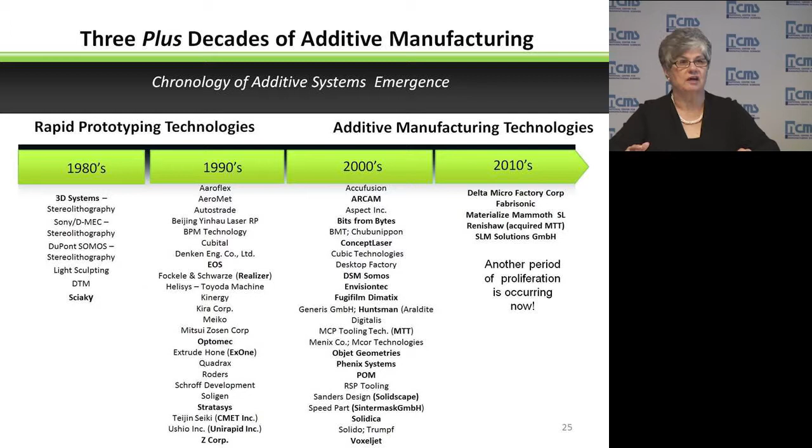Those who are in bold print are the surviving entities going forward into the 2010s, and those who are listed under 2010s are those new companies that have come up so far in this decade. Now we are entering another period of explosion and proliferation of 3D inventions, innovations, and companies entering this marketplace again. So we're liable to see that column grow extensively through the end of this decade and into the next. Next slide.

This is a timeline, just to give you a little bit of an overview. We won't go into it in detail, but we started out as a rapid prototyping program back in 1991. That was funded by the Air Force ManTech organization. And in 1998, we issued an industrial roadmap for additive manufacturing, but back then it was called rapid prototyping, was

the popular term. Then in 1998, we actually entered into the agreement with the OSD Maintenance Policies and Programs Office, with a collaborative agreement. And we took over that particular vehicle to launch the next phase of that rapid prototyping program. And so that began in 1999 and has continued uninterrupted until today in 2013.

Rare Parts today: what I want to tell you is that when we first started back in 1999, the context of the program involved transitioning and teaching the depots how to perform various case studies using additive. But the additive technologies resided in our industry partners. And so our industry partners performed these studies for depots as a learning technique.

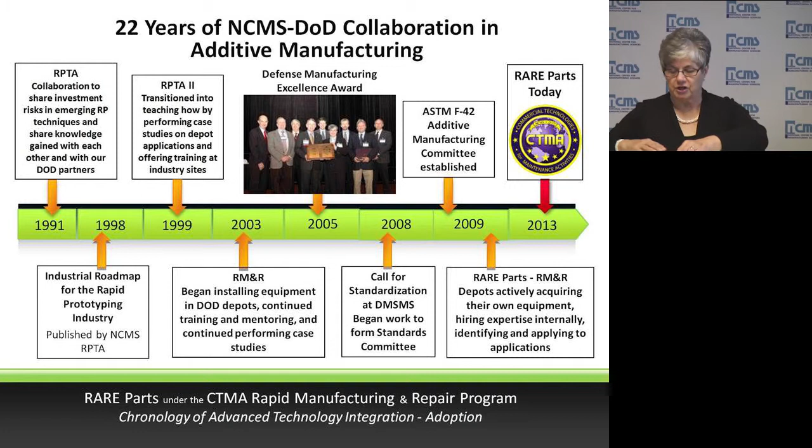So then by 2009, we started the phase that we called Rare Parts. And the Rare Parts phase denotes that the depots have actively started acquiring their own equipment, they're hiring their own expertise internally, and they're identifying and applying additive to their own internal applications. And they turn to the team now for advice, lessons learned. Everybody shares what they have learned over the years with one another to get everybody up and running. Next slide.

To give you a little flavor of the Rare Parts collaboration scope, what we've had to deal with over the years and what we still perform. We do benchmarking state-of-the-art that involves evaluating vendors and specific additive studies. We do standard part fabrication evaluations, and we have traditionally used a part that we created through our NASA partner, Ken Cooper at Marshall, and a copy of that is in the bottom corner. We've also done equipment installation and

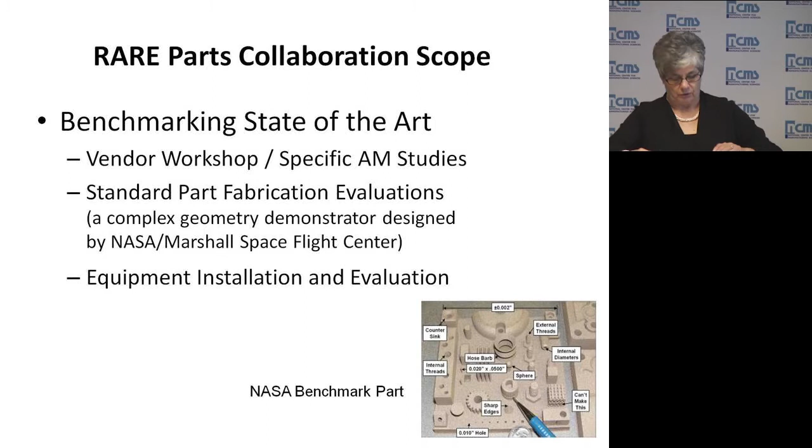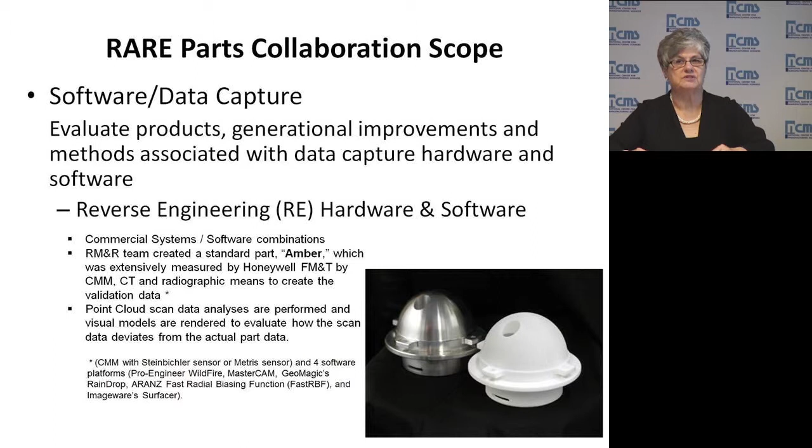evaluations. Next slide. The Rare Parts collaboration scope also involves software and data capture evaluations. We look at the products, both the hardware and software sides of reverse engineering. And the DOE facility at Kansas City, which is an NNSA facility, has developed what we call AMBER, and that's our test piece for evaluating reverse engineering systems. Next slide.

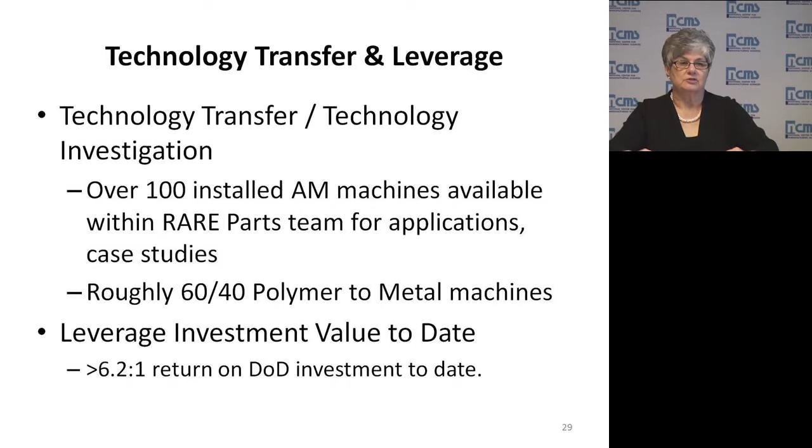One of the hallmarks of our project has been technology transfer and leverage. Over 100 installed machines are available to this team, within members of the team. We cover almost every single type of additive application and additive process that is currently commercially available. Roughly 60-40 is the percentage of polymer to metal machines, and the metal side is growing rapidly. Our leveraged investment value to date is 6.2 to 1 in terms of the return on the DoD's investment. Next slide.

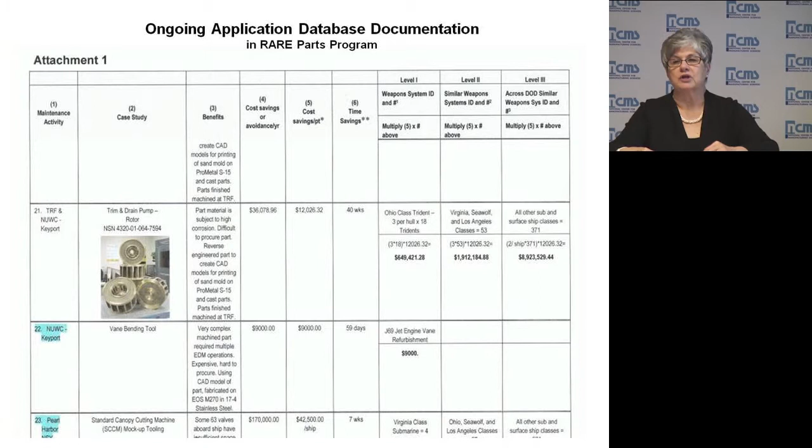This is a sample copy of an ongoing database that we maintain on the case studies that the team members have run and reported to us. This is the type of information that we collect. So that when we say we have so many dollars of cost savings in a year, we've documented all that. We've documented the process that they went through to create the part. And then we've done projections out over the weapon systems that are out in the field. Next slide.

This one is an eye chart. Sorry for that, but it's mostly made available for you when you get your printed copies. This is the typical quad chart that gives you a lot of information about cost projections, readiness savings, and what you will find there is that

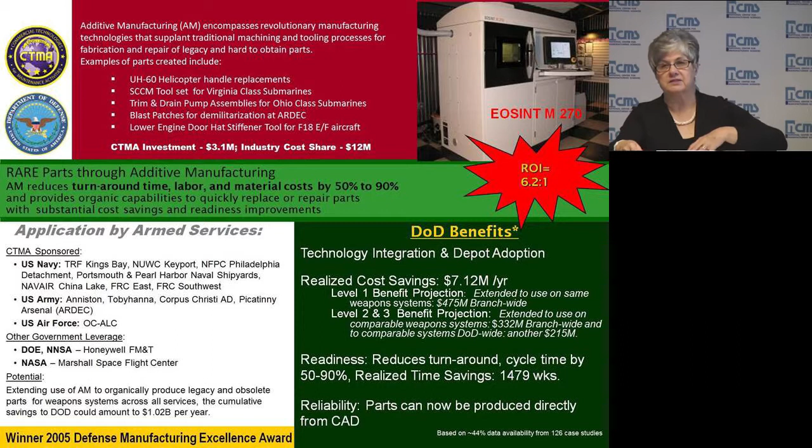I want to introduce some team member examples. One of the things you're going to hear this afternoon is you're going to be hearing from all of our government partners, and they're going to go in extensively as to how they've applied these technologies. But we don't very often hear from our industry partners how they're using it. Most of the time, it's because it's on a proprietary application. They're willing to share their additive experiences, know-how, and lessons learned, but we don't know the products.

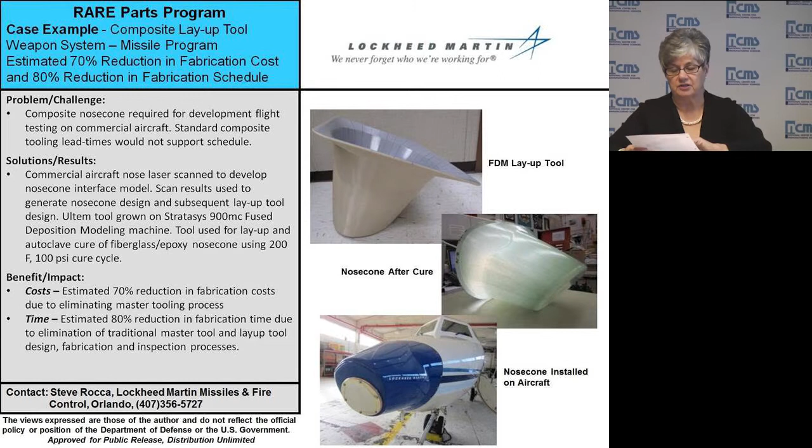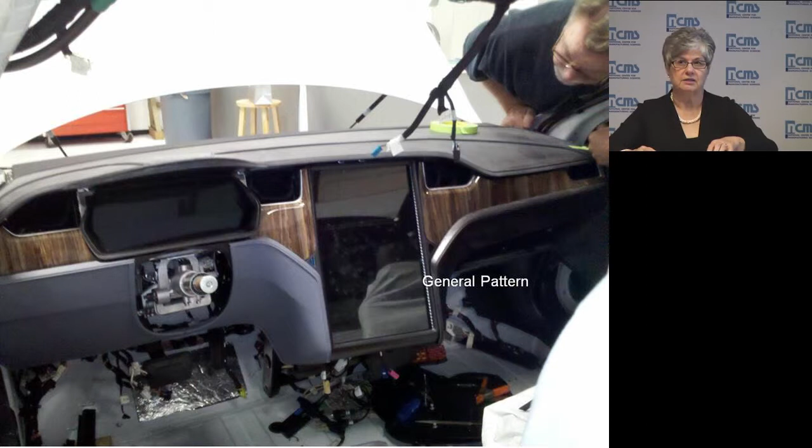This is a picture of a new model car, showroom level prototype that was produced by General Pattern. I cannot identify any further for you. Next slide. Again, they did the internal panels. Next slide.

This is made available by ATI and Met-L-Flo. This is a display and training model. It is a fully functional unit. All of the internal parts that were made with additive processes are functional and actually operate. Next slide.